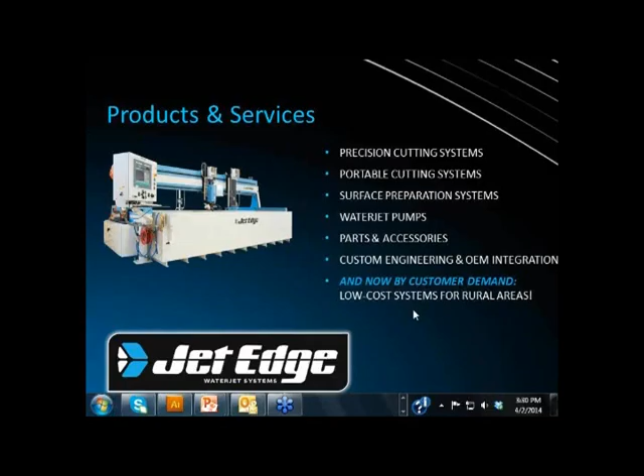We have a very proud history. In 1991, when we were just a fledgling company, we were given a call during the Kuwait oil fires to come up with a solution to cut off the damaged wellhead caps. I recall Saddam Hussein's troops set fire to the wellheads in Kuwait and caused a huge environmental disaster. They thought at the time that it would probably take 5 to 10 years to put out the fires, but they were able to put them out by the end of 1991.

And JetEdge waterjets were an important part in putting out those fires because we were able to go in there and cut off the wellheads that had been detonated by his troops - basically just a mangled mess that we had to go in and cut off. A few years later, during the Kobe earthquakes in Japan, JetEdge waterjets were deployed to help with the recovery efforts there. Then in 2007, JetEdge became one of the first manufacturers to introduce a 90,000 psi waterjet pump. Until that time, the standard pressure was about 55,000 to 60,000 psi.

Now if you consider that your average pressure washer may be about 4,000 psi, that's quite a lot of pressure. In 2007, JetEdge developed a NASCAR partnership with Michael Waltrip Racing, and Michael Waltrip Racing now uses 2 JetEdge waterjet systems to cut more than 1,000 parts for each one of his NASCAR Sprint Cup Series cars.

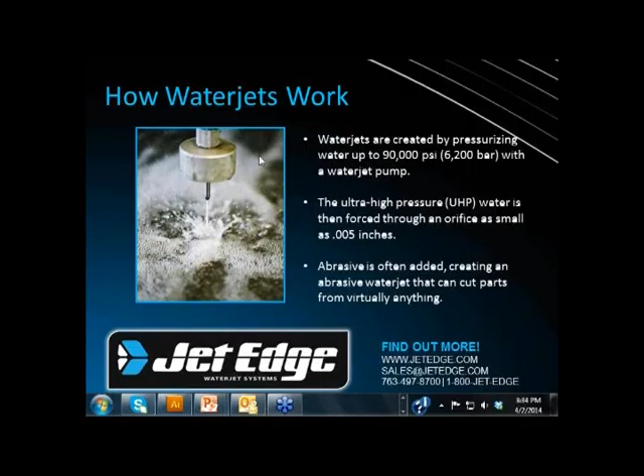It's also commonly used in the automotive industry for cutting carpets, also for cutting paper, diapers, rubber gaskets, and believe it or not, even bread is sliced with waterjets. The waterjet is going through it so quickly that it's not getting the bread wet.

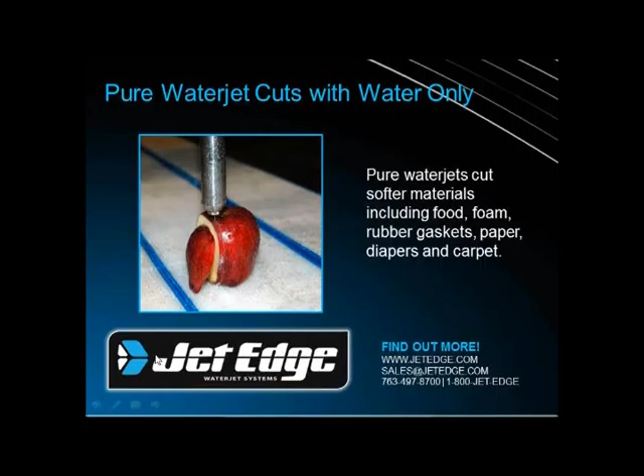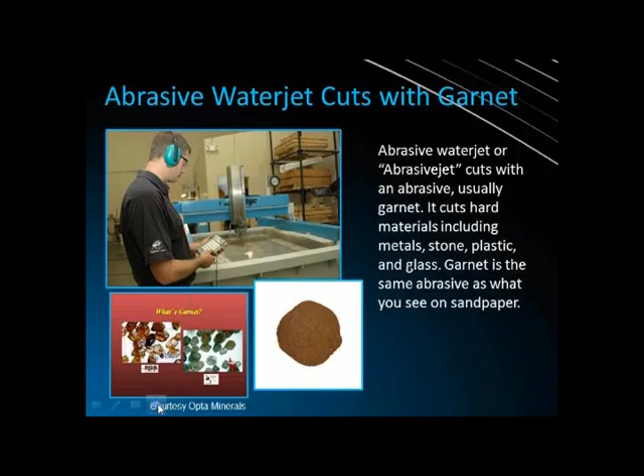What are the advantages of water jet? Well, there are many advantages of water jet cutting. It's the most versatile cutting and surface preparation technology on the market. You're cutting without heat or flames. You have no heat affected zone. You're not doing any damage to the material at all. And you can cut stacked material.

You can cut tight nests so that you're reducing your material waste and maximizing the use of your material. And you can cut any kind of material. If you have cleanliness issues for food, it's a great non-contact cutting tool for cutting food. It's also environmentally friendly - you're basically using water and abrasive, and that abrasive can be removed and recycled, or removed and landfilled, as long as you're not cutting any toxic materials. Water jet cutting also minimizes toxic dust and fumes. But by far the biggest advantage of water jet cutting is that it can cut virtually anything.

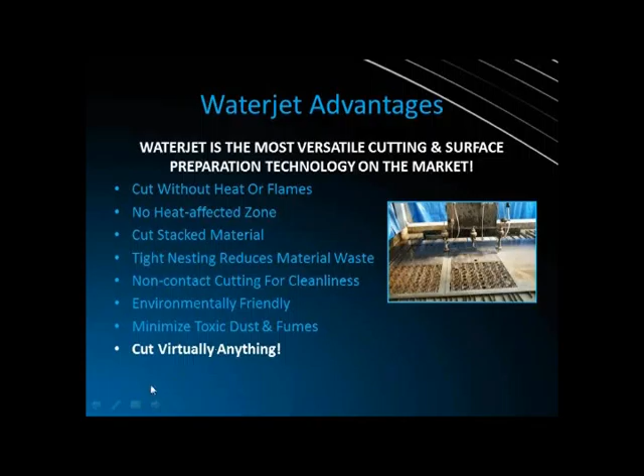So when we say it cuts any material, what do we mean? Well, for metals you can cut steel, aluminum, stainless steel, titanium, Inconel - which is a super alloy that cannot be machined by any other tools - and you can cut heat-treated hardened materials as well. So you have no limitations on what type of metals you can cut.

Plastics and rubber - you can cut nylon, plexiglass, UHMW, Lexan. You can cut glass and stone, even bulletproof glass, marble, granite, any kind of stone. And of course, as I mentioned earlier, you can cut food and much, much more. You're really only limited by your imagination when it comes to water jet cutting.

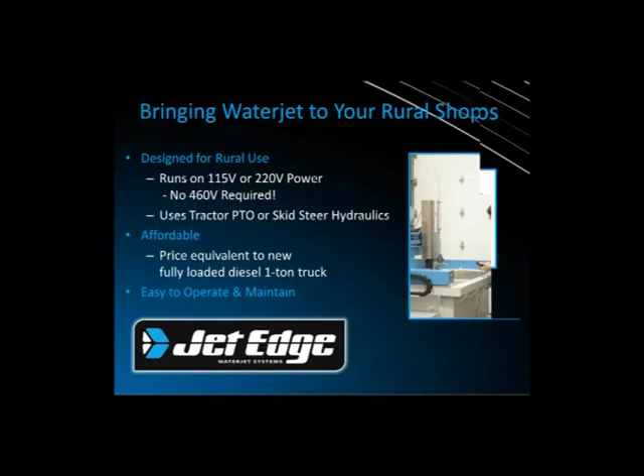We also want to make it easy to operate, so it's not a big, cumbersome piece of equipment that you're not going to use. We want to make it easy so that you go to this system and use it. So we have two configurations for farm shops: the Farm-Jet and the Tach-Jet. Both systems are able to produce 55,000 psi at 1 gallon per minute. They both use the same motion system, offering 40 inches by 40 inches of travel, with a PC-based controller.

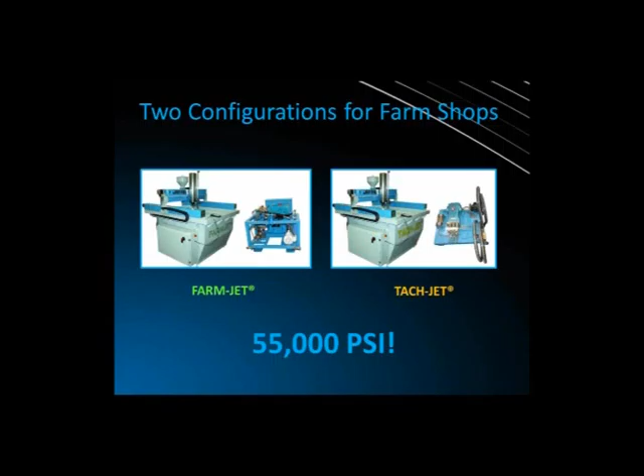The Farm-Jet. I'm going to talk more about the Farm-Jet here and explain some of the things about it. The Farm-Jet allows you to couple up.

To your Category 1 or Category 2 3-point hitch, and it requires 540 or 1,000 RPM PTO shaft. You also are required to have 115 volt power supply for the motion and for the pump, just for the boost pump, and you need a fresh water supply.

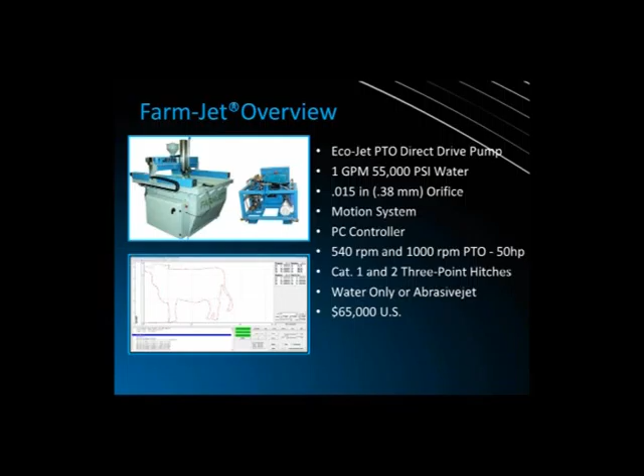So the pump itself is getting its motion from the PTO shaft on your tractor. Here's a little overview of the pump itself. You can tie in down below here - this would be where your PTO shaft ties in, coupled to your pump. This is going to be a direct drive style of pump, a cat style of pump, cat pump. And then we've put our modified pistons on the end.

So this is kind of an overview of how it works. Here's your fresh water coming in, goes through a boost pump, runs through a low pressure filter, and this ties into our plunger itself - our high pressure plunger here. It's getting intensified, it comes out through here as high pressure water. So this is going to be a low pressure hose, and out here is going to be a high pressure hose.

So now on this side it's going to be discharged as 55,000 psi at a maximum of 1 gallon per minute. It's going to come out and tie into a pressure relief valve, a bleed down on-off valve, going through the attenuator and out to the cutting head itself.

You're also required to have some compressed air. That compressed air is going to open your bleed down and your on-off valve on your cutting head.

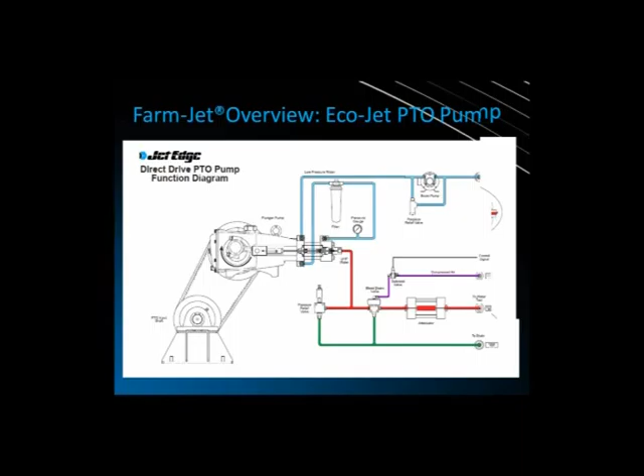Here's a little better viewing of the cylinders itself. So you can see you have your fresh water coming in here, fills up your plunger cavity, and it's intensified to a high pressure water and comes out at 55,000.

So here's a little zoom in on that. We have our low pressure water coming in through here. It comes in through our low pressure poppet housing. The plunger's in an intake type stroke, so it's stroking backwards. It fills up that cylinder.

When it changes direction, we can look on the bottom - now it's coming out as a high pressure. It closes the low pressure poppet housing. High pressure water comes down through the check tube housing, opens up the seat on the high pressure poppet housing, and travels out through that, out to your high pressure line into your cutting head itself.

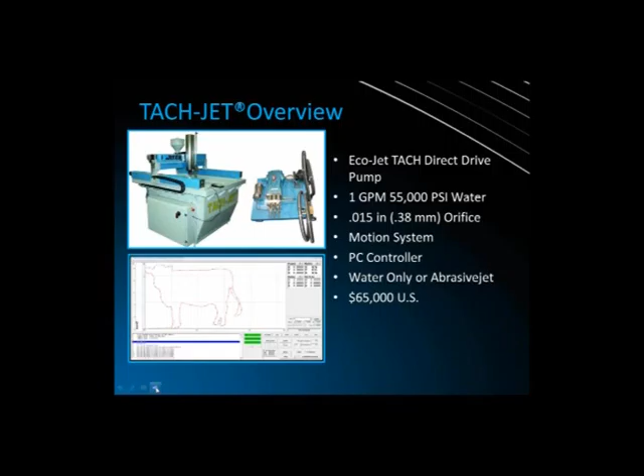The Tach-Jet, just like the Farm-Jet, produces 55,000 psi, 1 gallon per minute. Lets you run a maximum of 15 thousandths orifice. Runs on a PC-based controller. Cuts with water only or abrasive. $65,000 is where that's going to start at.

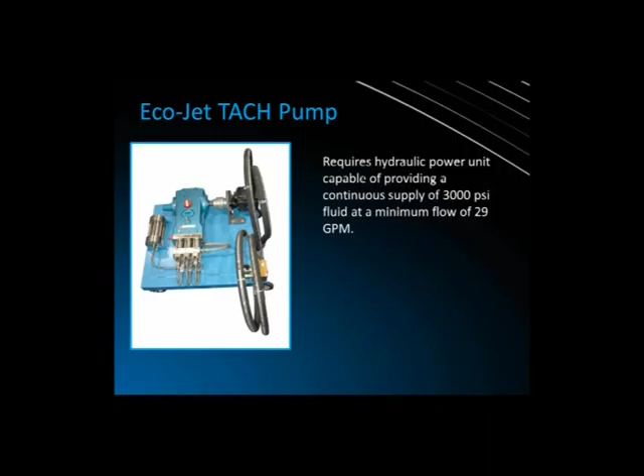So here's a rundown of the EcoJet. This requires, or EcoJet with the Tach-Jet, this requires a hydraulic supply of 3,000 psi with 29 gallons per minute. So you're going to need a high output hydraulic unit on a skid steer or on a tractor. So the hydraulics is what's turning your shaft on your cat pump.

We also offer a boss cutter. This is going to be a strictly electric type unit, so you won't have to tie in with another piece of equipment. This is going to utilize our EcoJet direct drive pump. It's going to put out 0.87 gallons per minute at 55,000 psi. The motion control is going to be the standard 40 by 40 inch motion control. It's going to utilize water only or abrasive jet. This one starts at $75,000.

The power requirements for this is going to be 230 volt 3-phase, 460 3-phase, 380 3-phase. The motion system will require the 115 volt 60 hertz or 230 50 hertz.

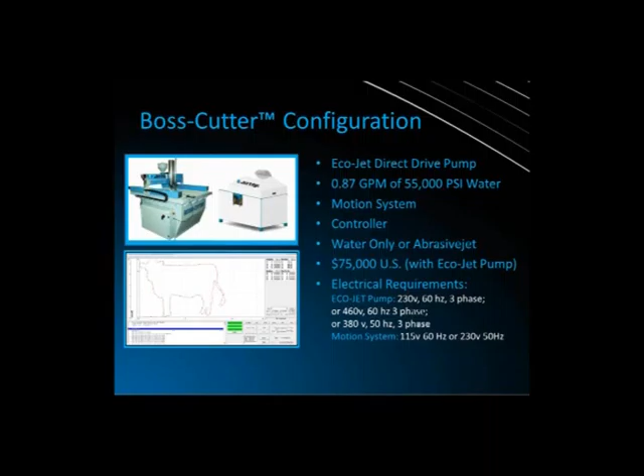Here's a view here of the EcoJet itself. So here we have our cat pump, and that's driven by our electric motor. Other than that, it's going to be exactly the same on this side. So we have our water coming in, water coming out, high pressure water coming out, running out to our cutting head.

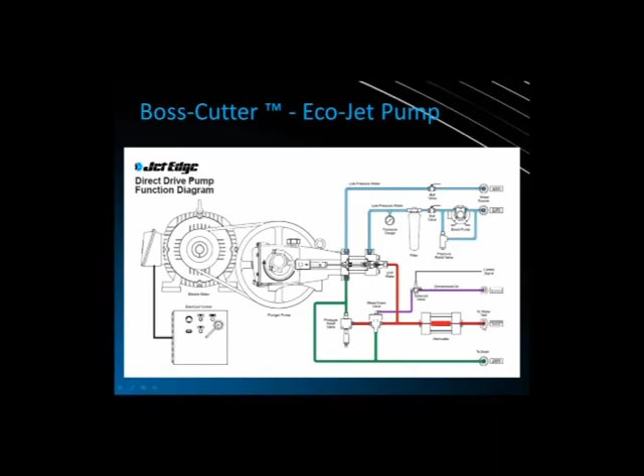So let's talk about the motion system. The motion system is going to be the same for either the Farm-Jet, the Tach-Jet, or the boss cutter.

It's just going to depend on how you're pressurizing that water to it. So the motion system is always the same.

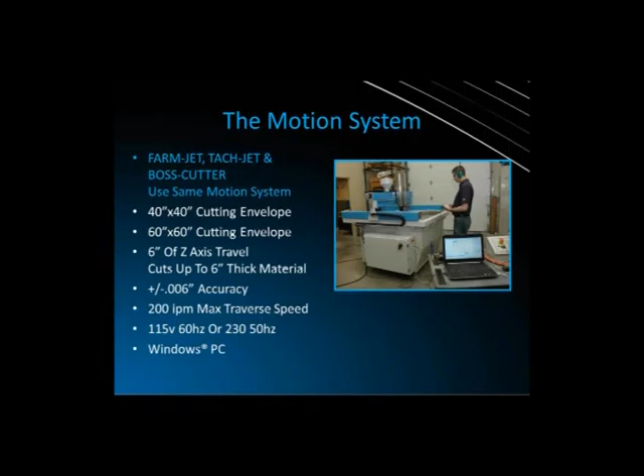It's going to come in either a 40 inch by 40 inch cutting envelope or soon to be released 60 inch by 60 inch cutting envelope. Gives you a maximum of 6 inches of Z travel, so that will give you the ability to cut material up to 6 inches in thickness. Its accuracy is plus or minus 6/1000ths of an inch. Has a max traverse speed of 200 inches per minute, and this runs on 115 volt 60 hertz or 230 50 hertz, and it runs on a standard PC controller.

Here's an overview of the controller. It's a Windows PC. You can use either a desktop or a laptop, and a pendant ties in with the motion system, so you can run the whole motion system with the pendant. That allows you to move left, right, up, down, do incremental moves, continuous moves, set program 0, start the program, stop the program, do a block retrace, start at a point. It gives you all those capabilities right through the pendant rather than having to use the PC. If you're more comfortable with the PC, you can do that. You can do everything through the PC that you could do with the pendant also. So if you're more comfortable that way, it's going to work out.

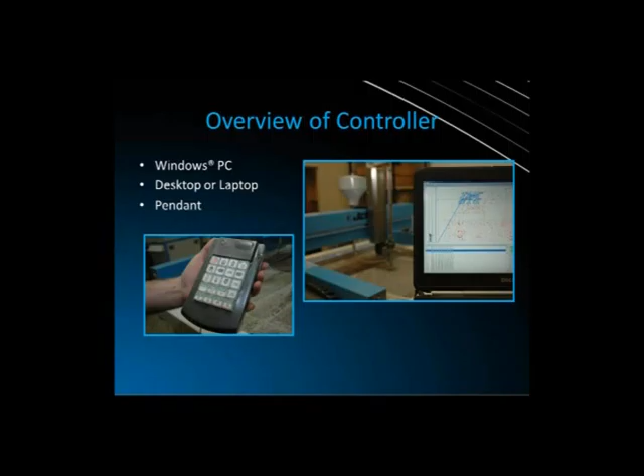An overview of the controller. We're using FlashCut. FlashCut is going to be the motion system, and it's also going to give you the ability to create CNC programs through DXF files. What this is showing you is a motion system as far as where your cutting head is located on the travel itself. So this is going to be our machine coordinates. If we set a program 0 coordinates, a relative coordinate system, and our distance to go.

This is going to be kind of our manual options here of G-code, jog, point, home, auxiliary, MDI moves, feed rate override. And this is going to be our program itself. So we have a readout of our program. We can see what's happening with it. We can see where it's going next, what the program is doing. We also get a graphic up here, so if we don't know how to do M&G code very well, we have the graphic here.

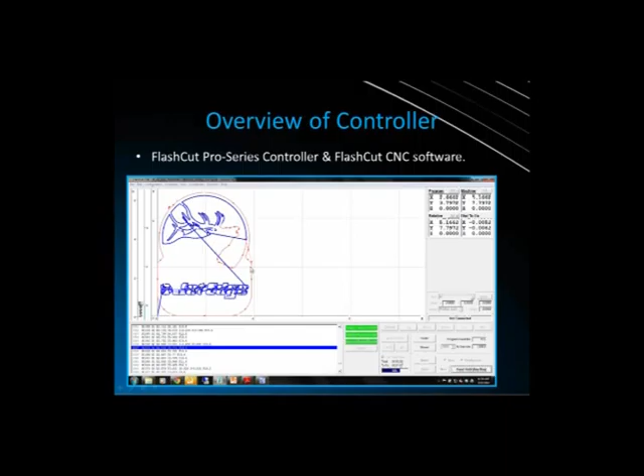It runs on standard M&G code. M&G code is an industry standard, and it's easy to edit. So you can read this file over here to the left, and that can tell you that it's doing a rapid move to this position. It's sitting there for half of a second dwell after the cutting head is turned on. It's now doing a work offset. It's doing a straight line at a feed rate of 9.6. It's doing another straight line to that position at 9.6. So I can easily read this program. I can make changes to it if I need to change where it's going. I need to change a feed rate. I can change anything in this program just using a regular text editor.

I can also create programs very simply by importing a DXF file. So if you know someone that can create DXF files, or if you've created a DXF file with the IGEMS software, you can import that directly in through the FlashCut. So it allows you to import a DXF, tell it your scale if you want to scale it. You can give it a feed rate. You can adjust your elliptical splines. Tell it where you want your start point to be. Hit the button, and it's going to spit you out a program.

Some time-saving features of the controller: block retrace. Let's say you're cutting, you have an issue with the abrasive or the water flow, or something happens. You have some type of issue in the middle of the cut. You hit the stop button. You can move the machine away. You can fix your problem. You hit block retrace, it's going to run the program backwards. So if you've been running for, say, an hour or 2 hours, and you have an issue with the cut, you don't want to have to rerun that program for an hour or two just to get back to where this issue happened. Hit block retrace, it will run the program backwards. Stop it, start it at that point, and you can run straight from that point on.

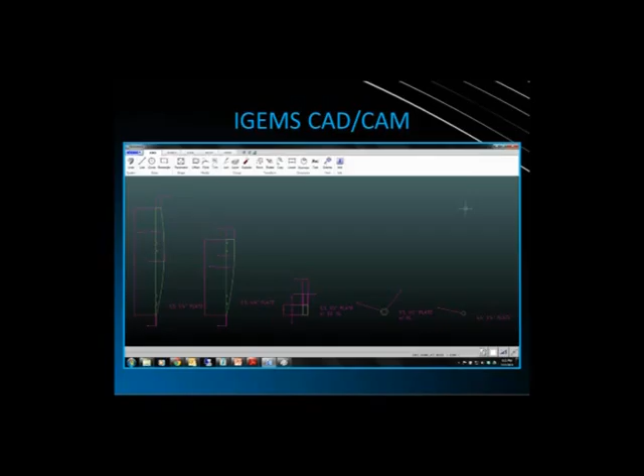iGEMS also gives you the ability to sketch, and sketching is going to allow you to take your mouse and use that like a pencil or a pen, and you can draw a feature or a part just by using that. So it works good for artsy type of cutting. So if you want to cut out silhouettes for the front yard, or do a tile inlay for the kitchen or the bathroom, it allows you to draw a simple shape that you could then create a program for and cut out. So it allows you to do some freehand type of work.

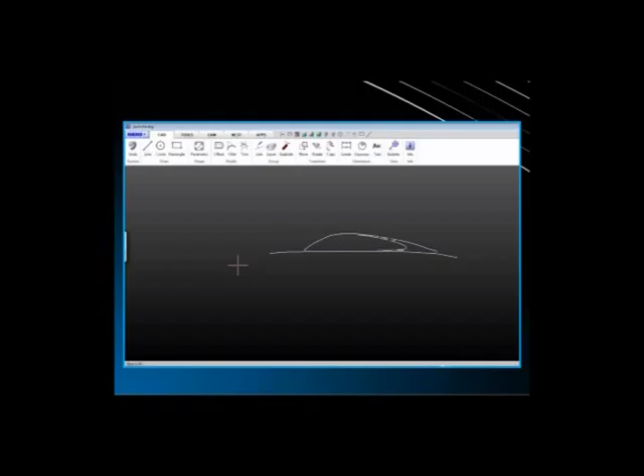You can also import or scan a JPEG or a drawing. So if you had drawn something on paper, you can scan that and create that into a part. So here's a part that has been sketched. This is just a freehand drawing that someone has drawn up, and now they could create M&G code for this and cut this out on the system.

What you see on the screen here now is nesting. On the bottom you see the parts. Those are going to be what this person wants to cut. So I want to cut out a bunch of different circles. I have the different sizes on there. I've told it how many of each circle I want, and I've told it that I have these 8 sheets

of material. So it takes these 8 sheets of material, and it automatically puts these parts out there as tight as it possibly can with what you've told it that you want. So if you only want it to be so close to the edge or so close to each part, it takes that into consideration and nests those parts onto those sheets. So that's one way of doing nesting. If you know what size sheets you have, you can do it that way.

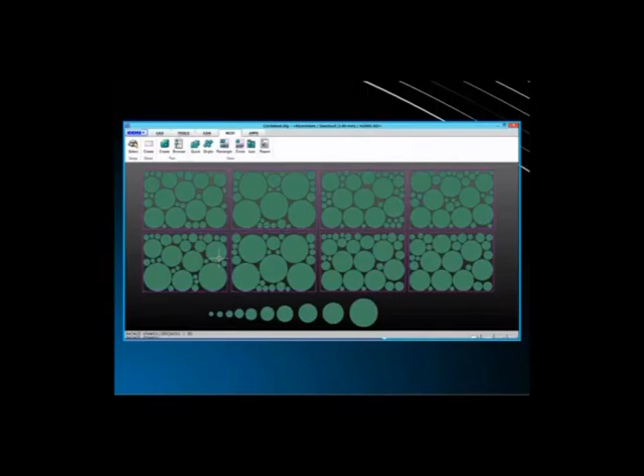Another way to do it is dynamic nesting. This allows you to take your parts, circles, squares, whatever it happens to be, and then you can just draw a little square, and it will automatically fill that in with your parts.

Some of the frequently asked questions: how much does a Farm-Jet cost to run? A Farm-Jet is going to cost you around $35.42 an hour, and we're basing that number off of electricity at 16 cents per hour, fuel at $8.36 an hour, water at $1.40 per hour, abrasives at $15 per hour. Now that's based on a pound of abrasive per minute at 25 cents a pound.

You can get abrasive that costs more. You can get abrasive that costs less. You can even adjust your abrasive flow rate so that you're running less than a pound per minute. It'll slow your cut down slightly, but it could reduce that $15 number. Your pump consumables are going to vary a little bit. They're going to be around $5 to $7 per hour. Your cutting head consumables are at $3.50 per hour. Like I said, $35.42 per hour.

The Boss Cutter is all electric, so you don't have that fuel price. You're going to be at about $1.64 an hour on electricity. Water, you're still at $1.40. Abrasive, $15 per hour again. Pump consumables still at $5 to $7, and your cutting head is still $3.50. So this is a little bit lower, coming in at $28.54.